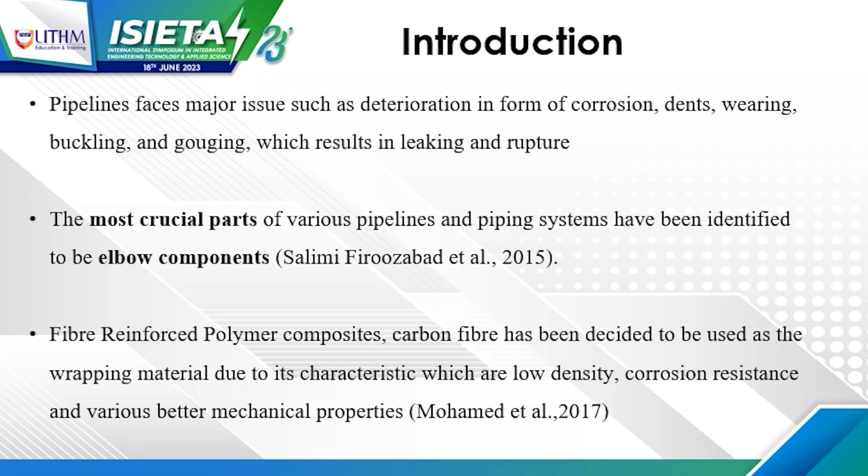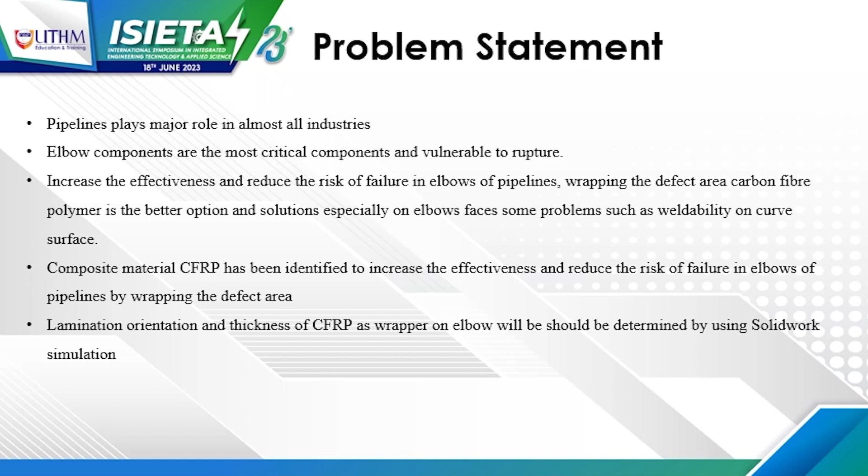Pipelines play a major role in almost all industries. We know there are many pipelines in almost all the industries. The elbow component is the most critical component, vulnerable to rupture and most likely to fail. To increase the effectiveness and reduce the risk of failure in elbow pipeline, wrapping the defect area using carbon fiber polymer will be a better solution. Composite material has been identified to increase the effectiveness and reduce the risk. The lamination orientation and the thickness of carbon fiber reinforced polymer will be determined by using Solidwork simulation.

There are three main objectives in this research. First is to investigate the properties of carbon fiber reinforced polymer as a wrapping structure on defected elbow based on different lamination orientation using simulation. Second, to analyze the mode of failure on CFRP wrapped elbows on various conditions, and to verify the optimized lamination CFRP structure on defected 90-degree elbow. All three of these objectives will be determined using the Solidwork software.

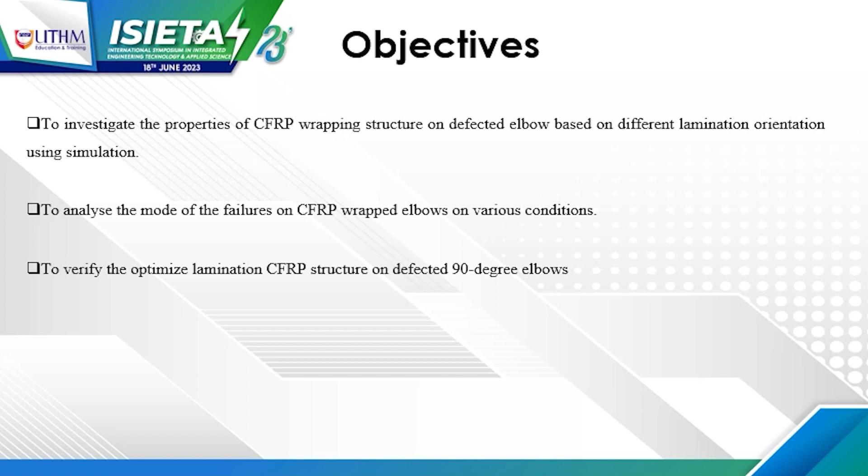For literature review, there are almost 21 types of corrosion failure involved in a pipeline. Examples are insulation failures, corrosion failure, wet insulation, groove pipe failure, and interior pipe deposit. The most common repair solution is to replace it with a new one. By introducing this wrapping method of CFRP, we can retain the existing pipe by only wrapping the defected area of a pipeline, especially on the elbows.

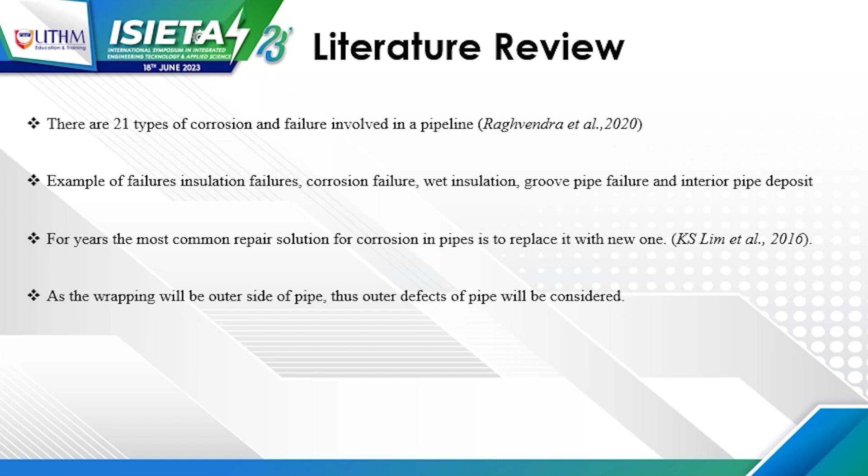In this paper, we're going to choose the type of elbow that we use for this paper, which would be long radius elbow, 90-degree, and it's butt welded, due to the application in oil and gas pipeline transmission.

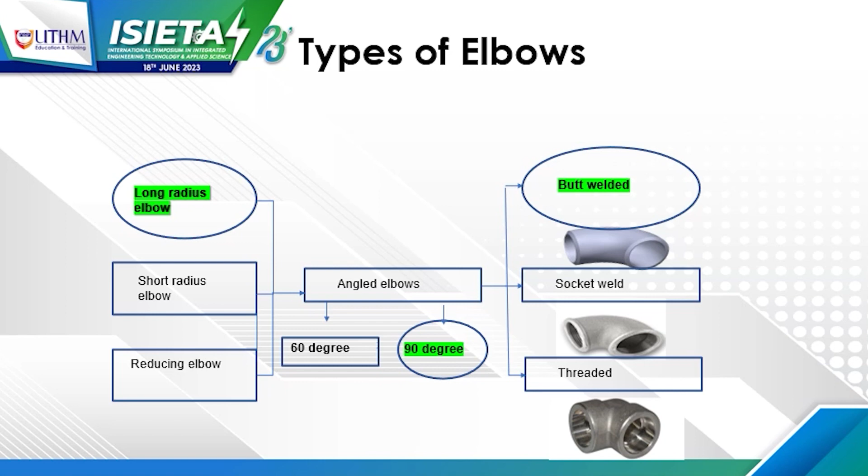Why elbow fails is normally due to excessive pipe ovalization and also its sensitivity to corrosion difficulties due to its functional role and complicated shapes, depending mostly on welding operation. Erosion and corrosion is a complicated material loss mechanism that always occurs due to a flowing fluid disrupt. This is why elbow failure is the most critical part compared to other fittings or other parts of pipeline.

When the fluid velocity is very slow, corrosion will be dominating. When the fluid velocity is very high, erosion will be dominant. There's a study by Raheem that says the surface roughness was higher at the entry region of the elbow than those at the middle and the exit region.

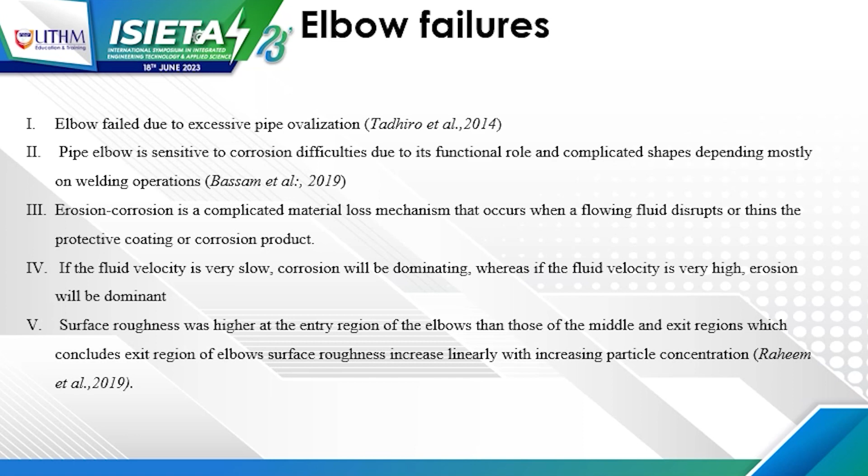There are other conventional elbow repair methods such as welding, epoxy fill repair sleeve, clamp repair method. But the downside of this repair method is like corrosion of bolt nuts, poor seal retention clamp, and also welding, due to increasing the temperature of base metal and then cooling down to room temperature very quickly. Uneven cooling will reduce the load carrying capacity of welded structure, meaning the weld beads, the welded part, will not be strong enough and will change the strength of the material.

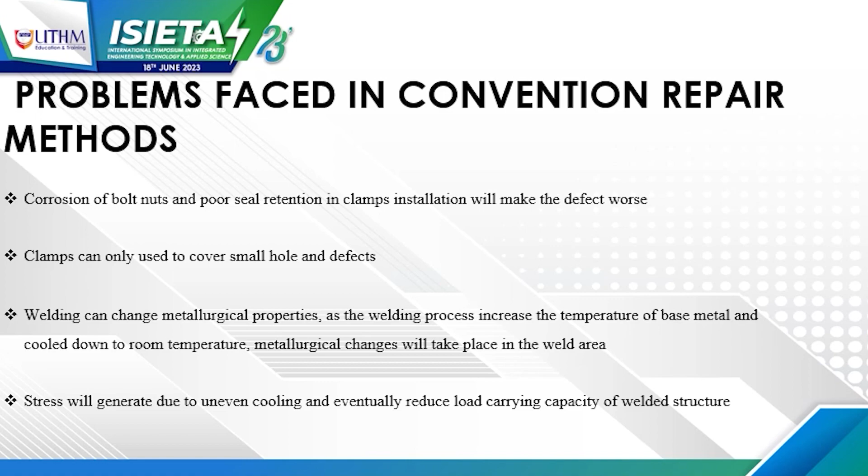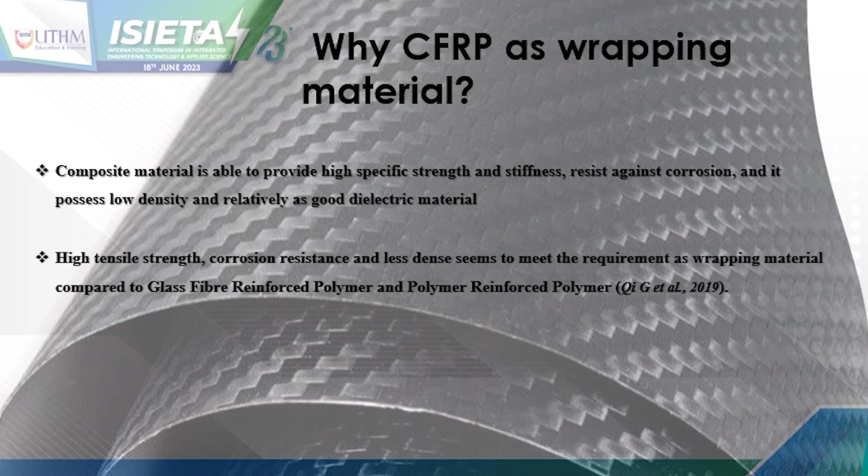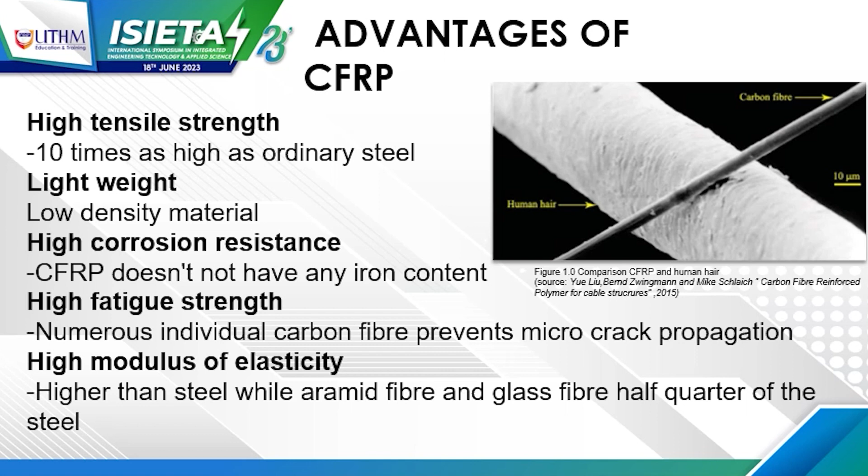Why we choose CFRP as our wrapping material is because of its own unique characteristics, which are high specific strength, stiffness, resist corrosion, and possess low density and good dielectric properties. As we know, for wrapping a piping material, we need it to be lightweight, highly corrosion resistant, high tensile strength, high fatigue strength, and also high modulus of elasticity. All of these unique properties allow us to wrap the defected area so it won't possess more stress or more load, but it will cover and increase the strength and stiffness of the material.

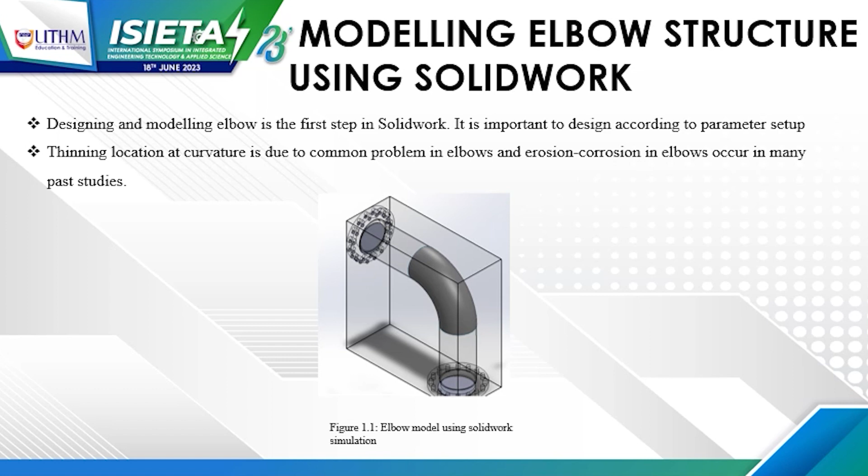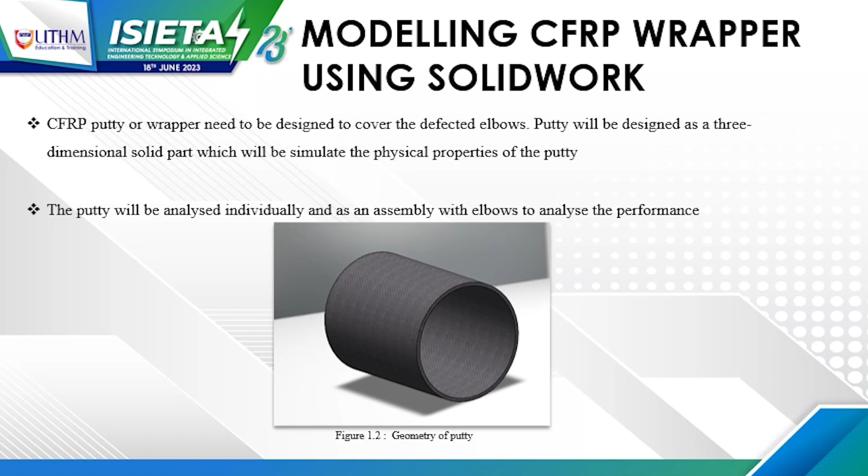This is the model of the elbow structure that we modeled using Solidwork simulation with the flanges. This is the putty or wrapper designed to cover the defected elbow. The lamination orientation and the thickness of each carbon fiber wrapper plies will be discussed later on.

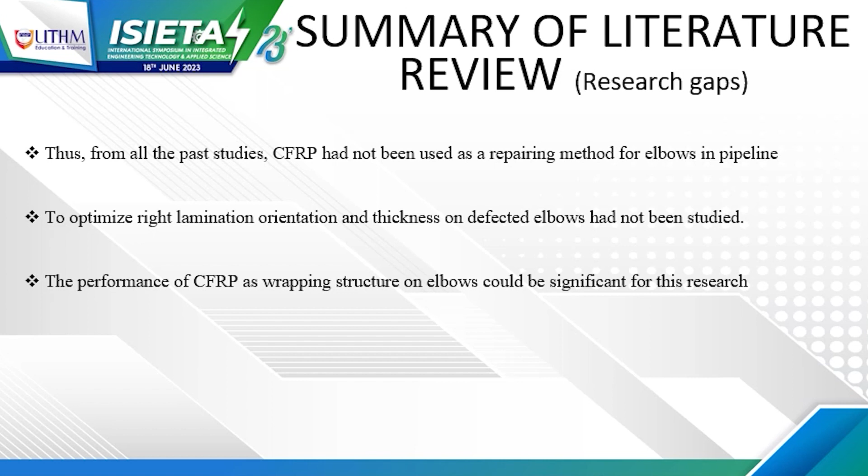For the summary of this literature review, from all the past studies, carbon fiber has not been used as a repairing method for elbows in pipeline. Optimizing the right lamination orientation and thickness on defected elbow had not been studied. The performance of CFRP as a wrapping structure on elbows could be significant for this research. So this is the methodology.

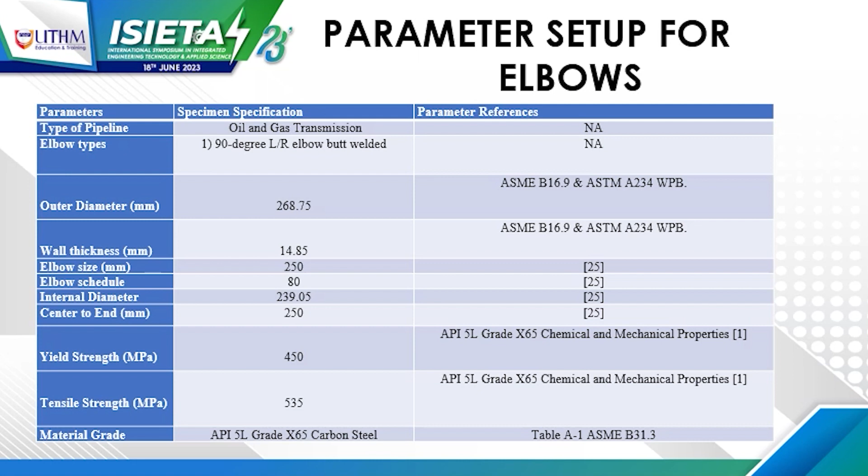So this is the parameter setup for elbow. Type of pipeline is oil and gas transmission, 90 degree, 10-inch elbow with material grade of API 5L grade X65 carbon steel.

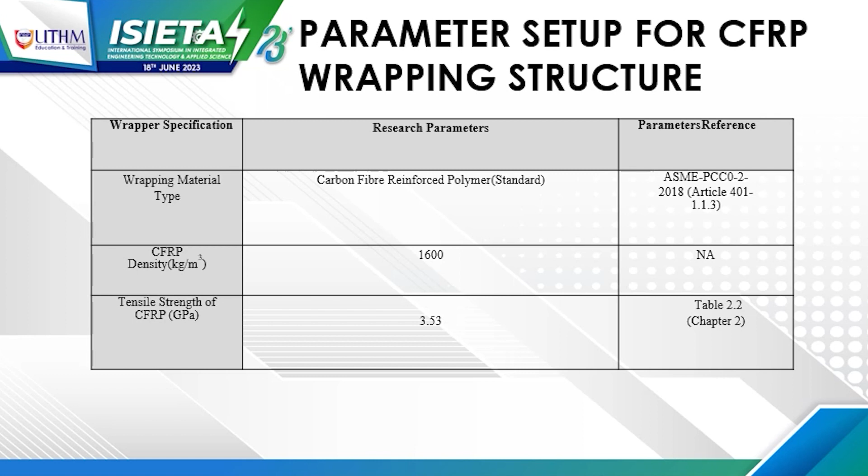This is the parameter setup for carbon fiber reinforced polymer wrapping structure with 1600 density and 3.53 gigapascal. This is the defect area with 70mm of extrados at the extrados location, defect area with 100% wall loss. It's considered like a pinhole on top of the elbow.

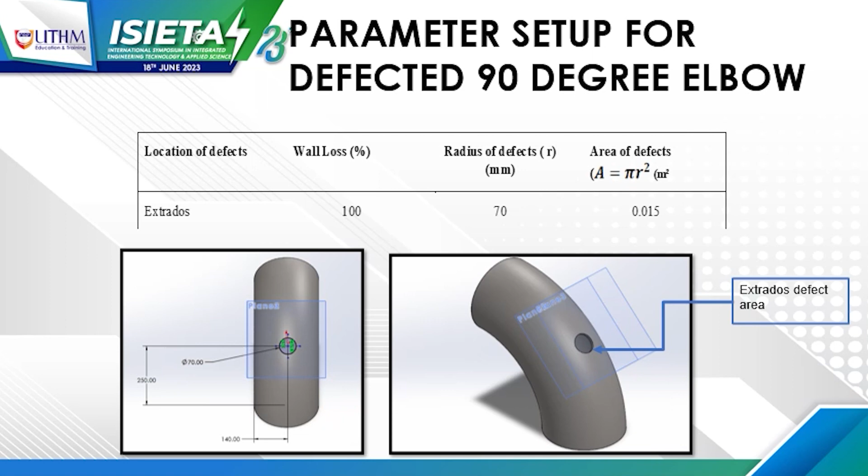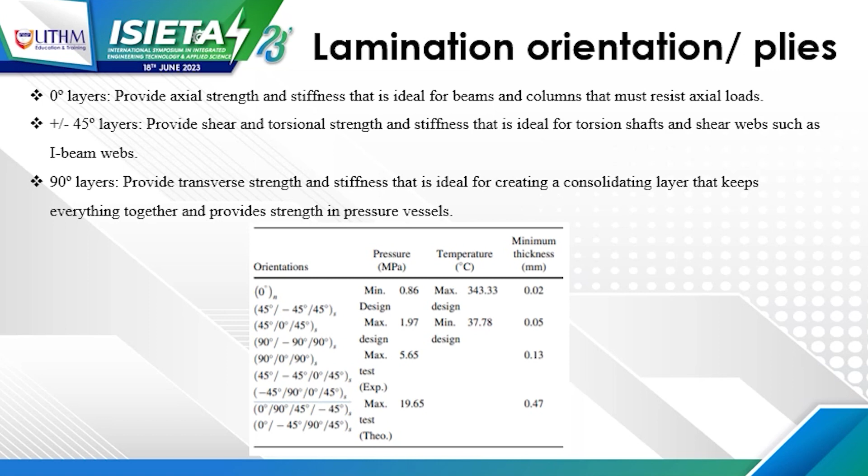The pressure load that we're going to simulate will range from 0.86 until 19.65 megapascal with different lamination orientations. There are two analyses that will be carried out in this research, static analysis

to identify the correct lamination orientation for the 90 degree defected elbow at extrados location, to identify the correct thickness of carbon fiber to apply on the defect area, and to compare the effectiveness of carbon fiber and glass fiber.

The second analysis would be flow simulation, to verify if it is watertight, and to observe the velocity, temperature, and pressure behavior in the piping model, especially at the defected area.

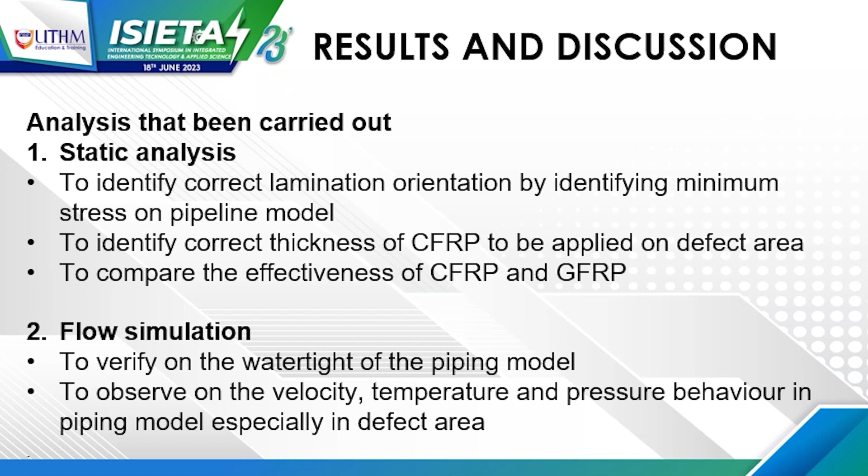This is the static analysis generated from the simulation. On the left is the lamination orientation from 0 degree until 0, 45, 90, 45 degree with 8 plies. Then the maximum stress generated for each lamination orientation, with 4 loads applied constantly.

which are 0.86, 1.97, 5.65, and 19.65 megapascal. The lowest we got is for lamination orientation 0 degree with 6 plies, showing the lowest stress, which is 3.283 for 0.86 megapascal.

When a load of 0.86 was applied, 3.283 megapascal was shown as the maximum stress. It's shown to be the lowest for every load applied.

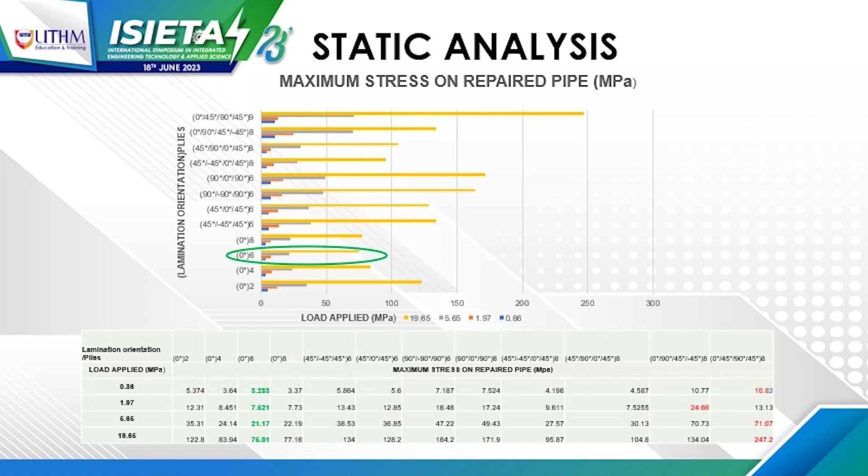This is a sample of results we got from our SolidWorks simulation, for the 0, 90, 45, and minus 45 degree lamination orientation with 0.13mm thickness, 8 plies. We can see the load of 0.86 megapascal applied, and the maximum stress is 10.77 megapascal.

This is the sample result, and this will be generated for each and every lamination orientation for the 4 different types of loads applied.

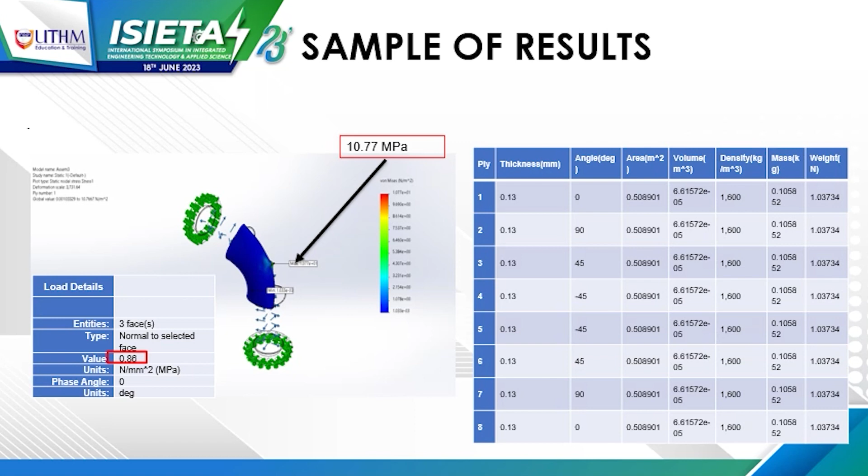Internal pressure load. So from this graph, we can see that 0 degree with 6 layers works best in terms of lamination orientation.

The greatest stress was seen at the 0, 90, 45, and minus 45 of 8 plies. So it can reduce the repairing time and cost of the CFRP wrapper, as it only needs to be wrapped in 0 degree with minimum thickness of 1.2mm.

From this simulation, we can know which one is the best and which is the optimum thickness. So why does 0 degree with 6 layers work best?

Due to 0 degree providing higher axial strength, and due to being perpendicular to the angle of diagonal shear crack - because it's a 90 degree elbow, the 0 degree wrapping method can provide perpendicularity to the angle of diagonal shear crack, and can also promote aggregate interlock, reduce the width of shear crack, and improve ductility.

As we can see, there's 0 degree with 8 plies, but it shows slightly higher stress than 0 degree with 6 plies.

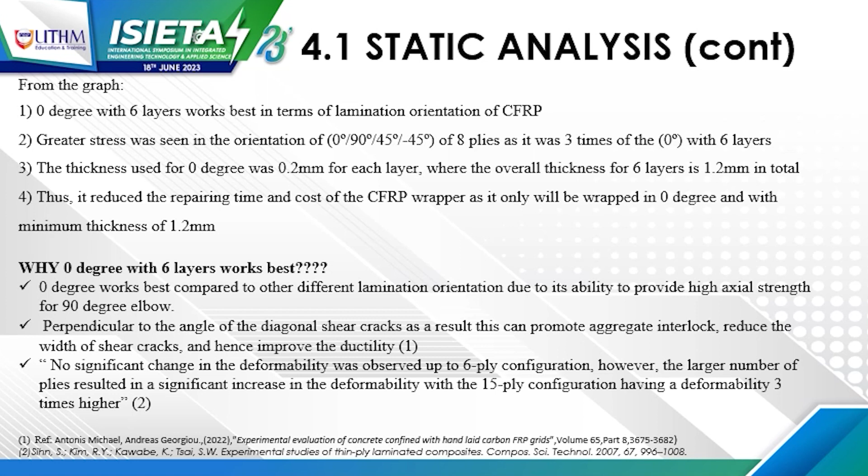There's research showing no significant change in deformability was observed up to the 6 ply configuration. A larger number of plies doesn't mean increased strength, but it does increase deformability. This is mainly due to the load and stress being applied to the defected area.

This is the comparison of carbon fiber and glass fiber. Carbon fiber shows less stress compared to glass fiber when internal pressure ranging from 0.86 to 19.65 is applied. This shows that carbon fiber exhibits greater material properties compared to glass fiber.

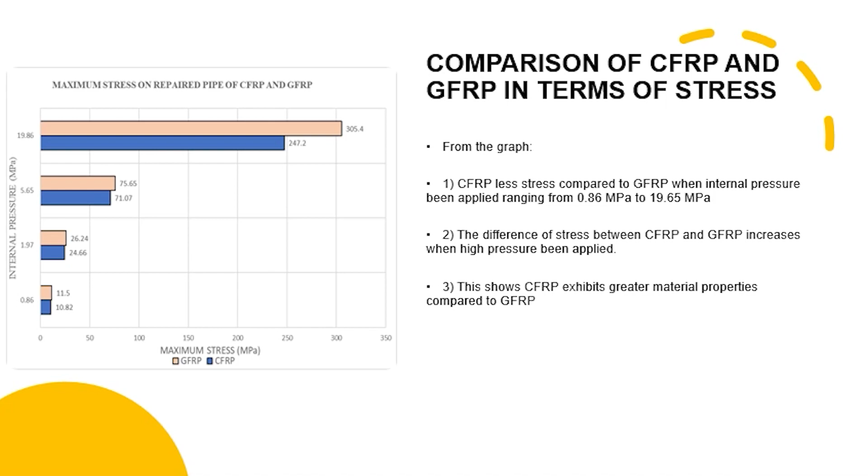This is the velocity trajectory and pressure cut plot. There was no big drop in pressure or significant change in velocity. Only in normal cases, there's a change in velocity at any bend or fitting in the piping system.

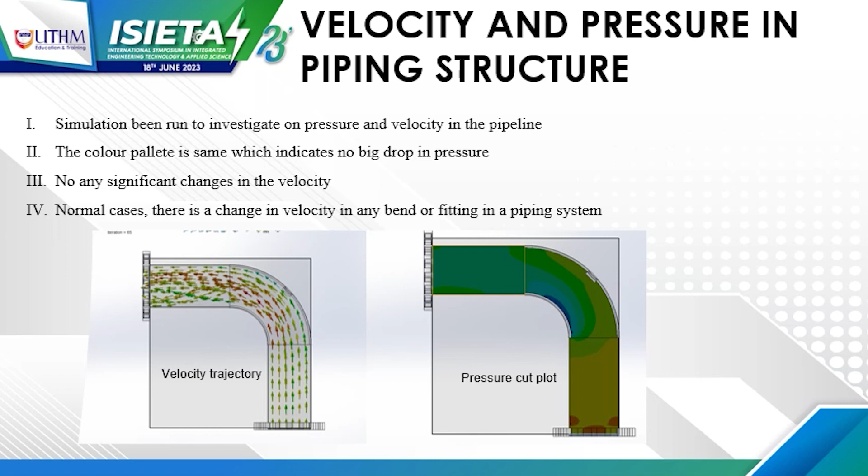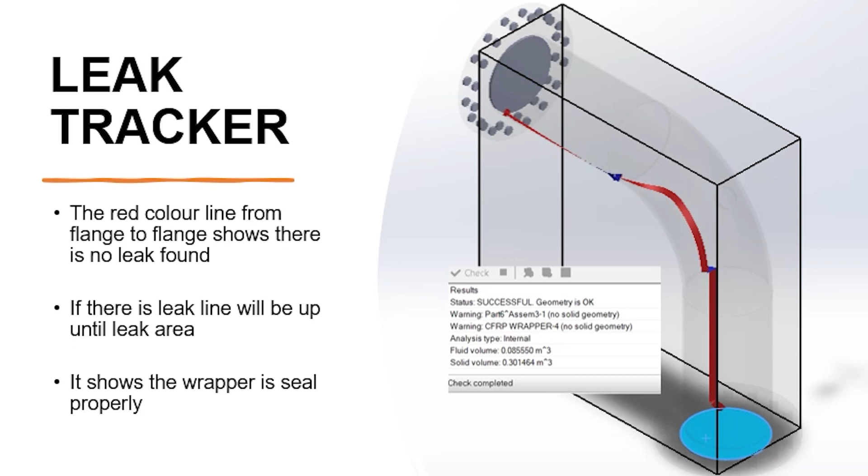This is the leak tracker. It shows there's no leak when the red line is connected from one flange to another flange and the geometry is okay. So it shows the wrapper is sealed properly.

In conclusion, CFRP possesses better material properties for wrapping a 90-degree elbow compared to glass fiber. Carbon fiber with 0 degree with 6 plies shows the best lamination orientation for the 90 degree extrados defect area. Flow simulation in this research showed that fluid was not disrupted and there was no change in pressure and velocity.

Preliminary studies justify that the wrapping method of CFRP can be used in real-life applications for any defects at an elbow. This simulation could save cost and time, as simulation is able to give the lamination orientation with thickness. Thank you.